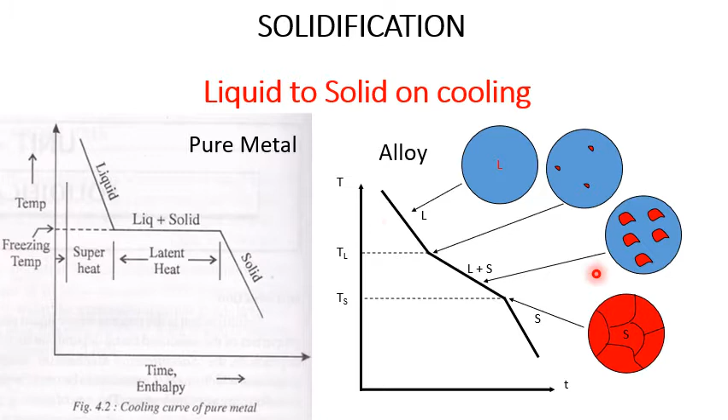In order to understand the solidification process in a pure metal or alloys, there are two stages. One is nucleation of a minute crystal. Say if you have a mold cavity and you pour molten metal into it, there should be favorable conditions where nucleation is going to start, and those nuclei will further grow, giving rise to grains and defining a grain boundary.

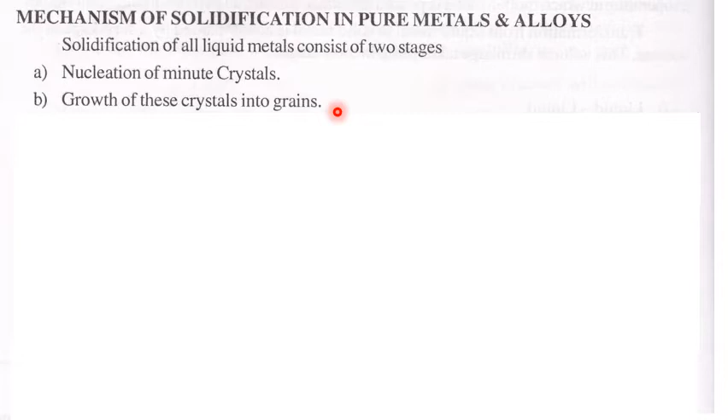So the first step is nucleation, and we'll see how exactly these things happen. Next is growth of these crystals into grains. Once a cluster of atoms of the same energy level comes together, they form a cluster. This cluster of atoms is defined with a radius, the critical radius. If this cluster reaches the critical radius, it will further grow; if not, these atoms will dissolve back into the liquid metal until there's a favorable condition for nucleation. We'll see how these happen one by one.

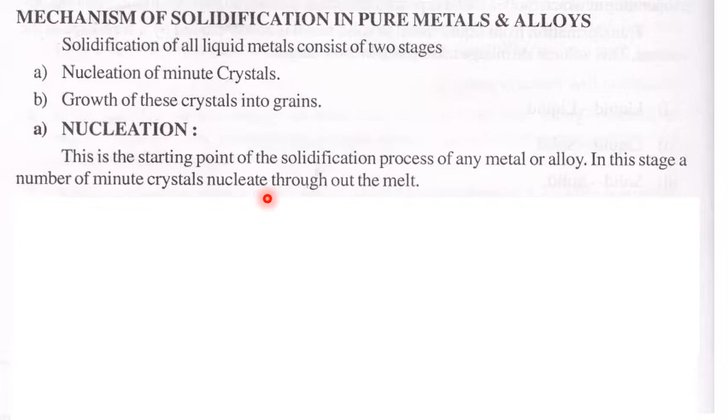First, it's important to know what exactly nucleation is. This is the starting point of the solidification process in any metal or alloy, where the nucleus is formed with a cluster of atoms in the molten metal. Whenever we talk about nucleation, there should be a cluster or number of atoms that get attracted and form a cluster of atoms. Once the radius of this cluster reaches a critical value, they will grow further.

If not, they will again dissolve and try to form that cluster until they reach the critical radius. So what exactly is this critical radius?

How this critical radius plays an important role depends on the type of nucleation. We have homogeneous nucleation and heterogeneous nucleation. Depending on the type of nucleation, the critical radius and the amount of energy required to form this critical radius differs from one process to the other.

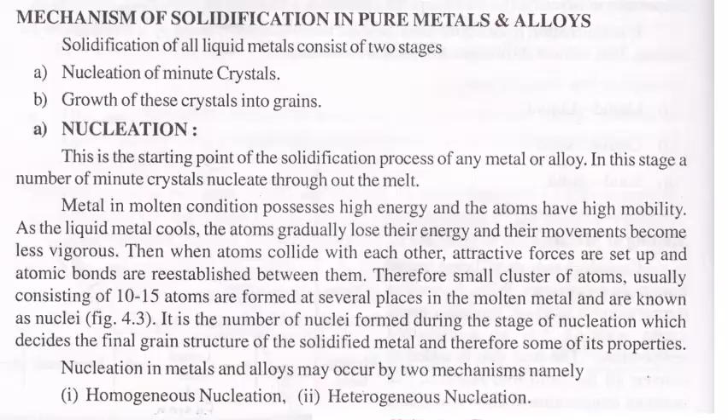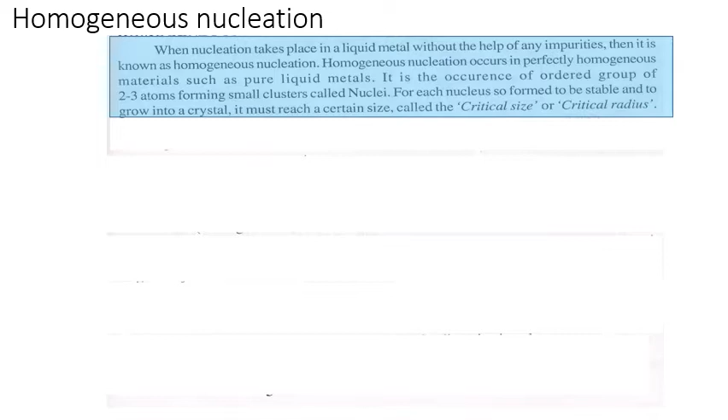So now we'll move on with the first type of nucleation, that is homogeneous nucleation. Homogeneous nucleation is the nucleation which occurs without any help of impurity or external aid. That is what we call homogeneous nucleation. Normally this type of nucleation occurs in pure liquid metals.

As I said, the cluster of atoms combine together to form a nuclei, and that nuclei will further grow. In order to grow further, that nuclei has to reach a critical radius. So how to calculate this critical radius? What is the criteria? We'll see now.

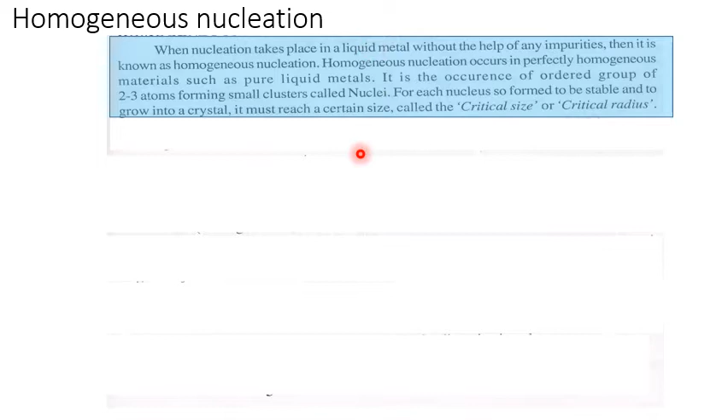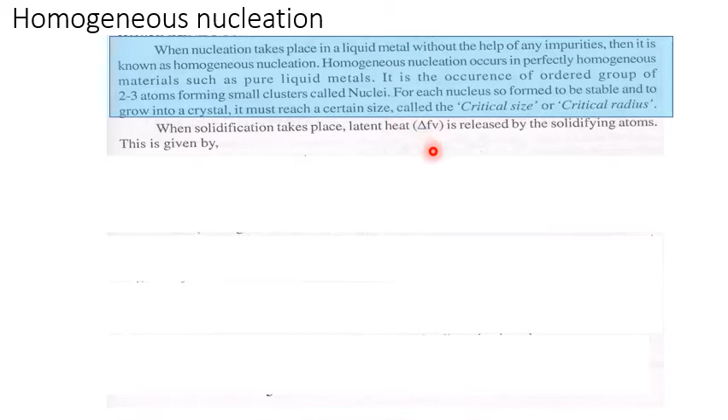In order to calculate that critical radius, we need to understand that whenever the liquid freezes into the solid, it liberates some latent heat of energy. The liquid, when it freezes to the solid, the temperature has to come down, so it liberates some heat in the form of latent heat. That one we indicate with delta FV, given by minus 4 by 3 pi r cube delta G.

Now, what exactly is this 4 by 3 pi r cube? It's the volume of atoms. Here a cluster of atoms, we assume it as a spherical one. Delta G is nothing but the latent heat, and the negative sign indicates there is a liberation of the latent heat. When a liquid freezes to the solid, it liberates some amount of latent heat, given by minus 4 by 3 pi r cube delta G.

Whenever a liquid freezes into a solid, there is formation of a new surface, which requires some energy to be invested. That is given by delta Fs equals 4 pi r square gamma, where 4 pi r square is nothing but the surface, and gamma is the surface energy. So 4 pi r square gamma is the amount of energy required in order to form a new surface.

Here the plus symbol indicates the heat is absorbed, or we need to invest this energy in order to form a new surface. So delta Fv is the amount of energy which is liberated, and delta Fs is the amount of energy which is absorbed. Here it is lost and here it is gained.

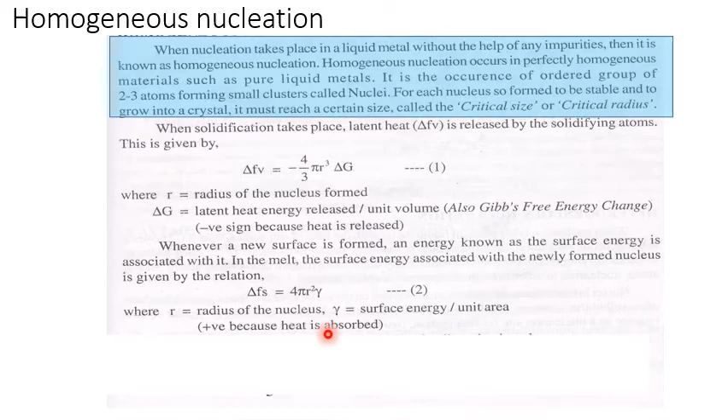Combining these two, the energy which is liberated and the energy which is gained, the change in the internal energy should equal zero. So the total energy, delta F, equals the summation of delta Fv and delta Fs. Substituting 1 and 2, we get minus 4 by 3 pi r cube delta G plus 4 pi r square gamma.

In order to get the total energy, as I said, delta Fs, the surface energy, is 4 pi r square gamma, which is positive, meaning it should be absorbed or invested to form a new surface. And 4 by 3 pi r cube is the amount of energy which is liberated, so it is in the negative sign.

The change in that energy, delta G, is given like this: it reaches a maximum value, then it suddenly drops down. This critical free energy is given with the corresponding radius, the critical radius. In order to calculate the critical radius, the summation of these energies, the surface energy and the volumetric free energy, should be equal to zero.

So how exactly we're going to get that is, we'll take the differentiation of the free energy, which should be equal to 0, or d by dr of minus 4 by 3 pi r cube delta G plus 4 pi r square gamma should be equal to 0. By differentiating this with respect to r and equating to 0, we'll get the critical radius is equal to 2 gamma divided by delta G.

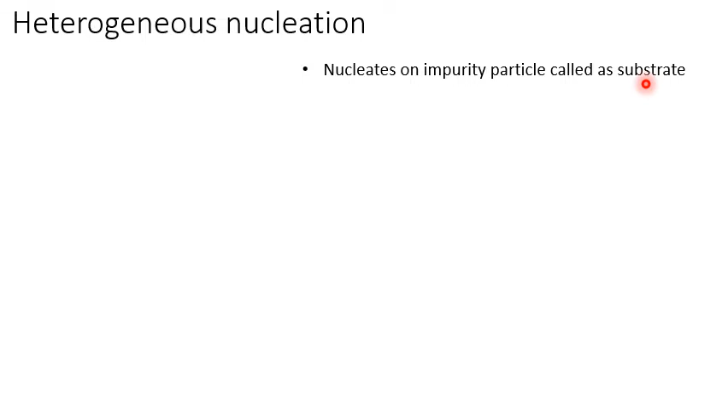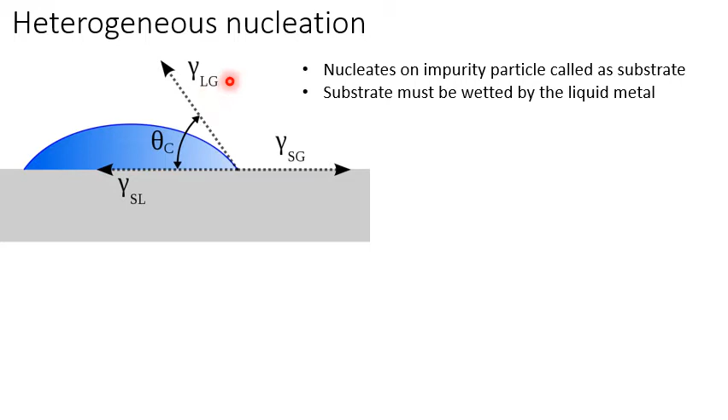So you can see the surfaces. Gamma SL is the boundary which separates the liquid from the solid, here solid with respect to gas, and here liquid with respect to gas, and the contact angle theta c should be less than 90 degrees. These are interfacial tensions, with the suffixes standing for liquid, solid, and gas. For heterogeneous nucleation to be favorable in a mold provided with impurities, the contact angle should be less than 90 degrees. The favorable condition is theta less than 90 degrees.

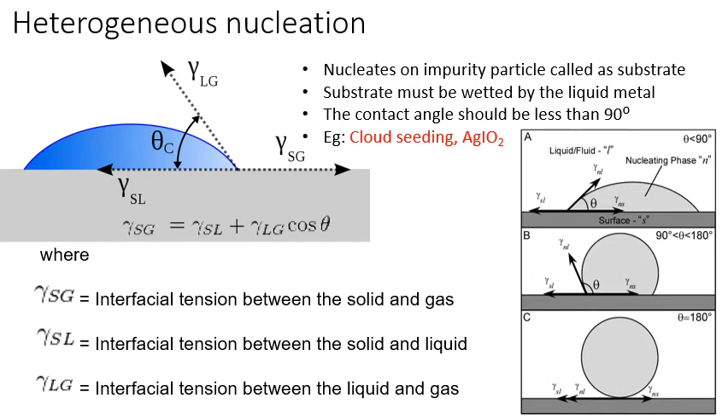When theta c is equal to 180 or between 90 and 180, these two conditions are not favorable for heterogeneous nucleation. For heterogeneous nucleation, the surface should be wetted properly; only then will the contact angle be less than 90 degrees. The best example of heterogeneous nucleation is cloud seeding. To get rain artificially, they do cloud seeding by spraying AgI, which forms on the clouds and condenses the water, and then rain takes place.

Once we understand the different types of nucleation, homogeneous nucleation in a pure metal and heterogeneous nucleation in an alloy, we can understand the different types of grains we get. When we have these types of nucleation in a casting, or cast structure, we get columnar grains, equiaxed grains, and columnar and equiaxed grains, meaning three types of grain structures. So how exactly do we get columnar, equiaxed, or a mixture of these?

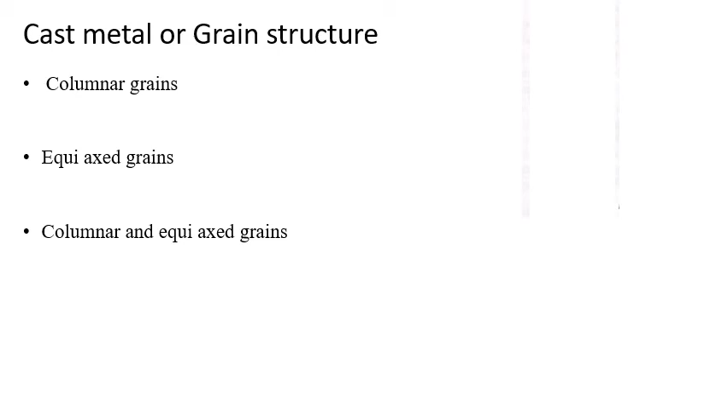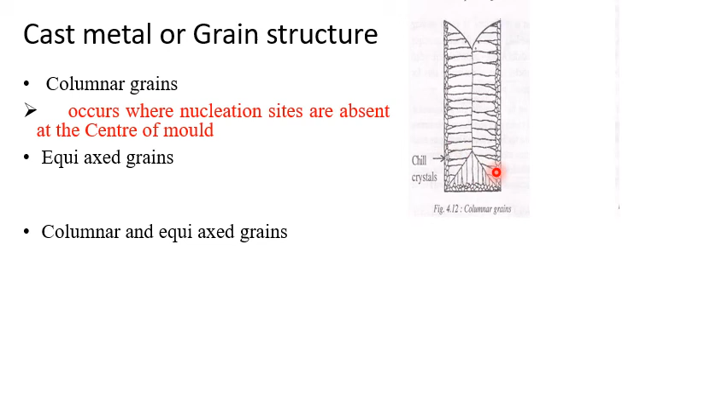So whenever we need metals with higher strength, we are going to control the number of nucleation sites, and by cooling it suddenly to room temperature, we can have fine, equiaxed grains which are of the same size.

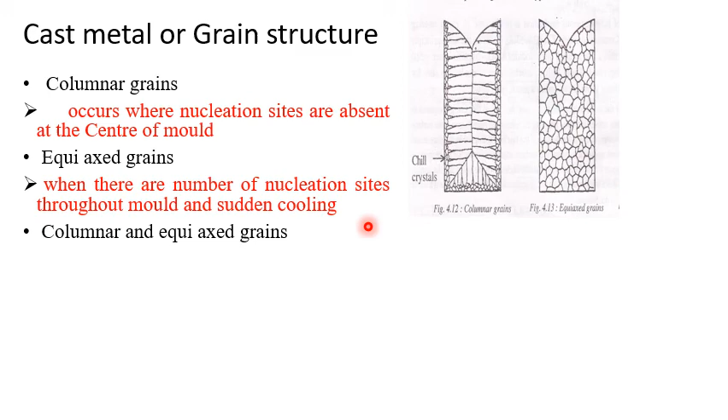Next is a mixture of columnar and equiaxed grains, where the solidification begins like a pure metal and ends like an alloy. The nucleation sites are going to start at the middle of the mold cavity and also at the mold wall. Where they start at the mold wall, they grow columnar, and the nucleation sites present at the center will form equiaxed grains. Solidification starts from the mold wall; before they grow, nucleation starts at the center.

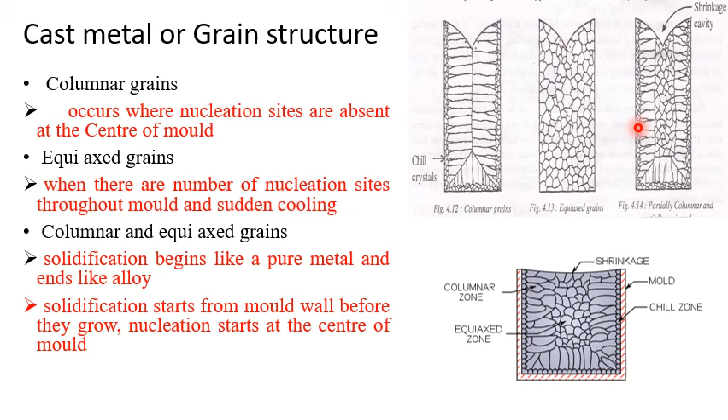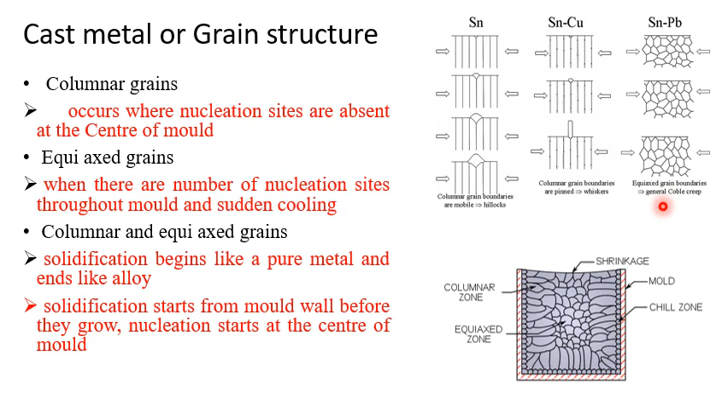So the nucleation is going to occur all around at a time, at the mold wall as well as at the center. When these equiaxed and columnar grains encounter each other, the solidification freezes, and we get a mixture of equiaxed and columnar grains. You can see it here, the way in which we get the different types of grains.

So now how exactly can we control the type of grains we get in a casting? It depends on the pouring temperature, the mass of the metal, the mold material and its thermal conductivity, and the composition of the alloy. All these things control the type of grains we get in the mold cavity. For grain refinement, the pouring temperature should be low, and it should cool to room temperature suddenly. Then we get a fine size.

The mass of the metal also matters. Whenever we pour a small amount of metal, there is no time for solidification, so then we can get a fine grain size. And the mold material and its thermal conductivity: if the mold material has a high thermal conductivity, the heat flows readily, and the grains will not grow into larger ones.

Even the composition of the alloy also. If there are any intermediate or hard particles present, they will lead to heterogeneous nucleation, the number of nucleation sites will be more, and that leads to equiaxed grains. So each of these factors, like pouring temperature, mass, mold, or composition, affects the type of grain we get in the casting structure.